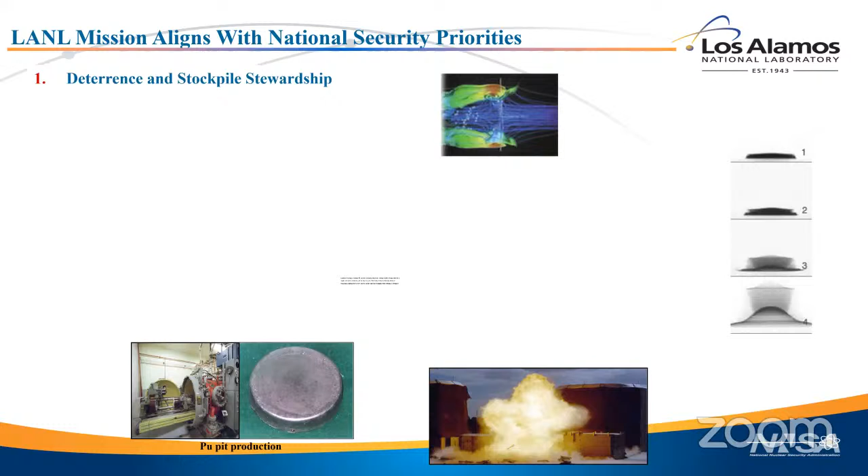There we go. Okay, so Los Alamos National Lab. The interesting thing about Los Alamos is we have a distinct mission, right? So a university or even some of the other national labs, maybe their mission isn't so well defined, but Los Alamos very much has a mission.

That number one mission is to keep our nuclear stockpile deterrent, operable and functioning and safe and all those sorts of things. So we have a goal in the research that we do, and that drives certain things.

And you can sum up our mission. This is the way it was summed up to me when I was a new staff member. So you should all be aware we don't test our nuclear weapons. We haven't for 30 or 40 years.

So you can think of this as having an F1 race car. These aren't Ford Pintos that we have out in the desert of Arizona or Texas. These are cutting edge, high technology components when they were built. So taking an F1 race car, keeping it in running shape without turning the key and starting it, and it's been sitting in the garage for 50 or 60 years, and you need to have confidence.

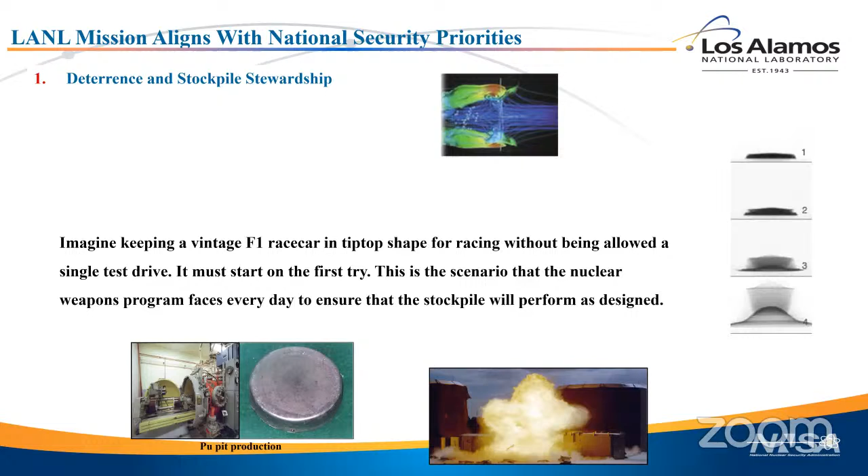Every year, the director of Los Alamos National Lab signs a letter to the President of the United States saying, I certify if you turn the key to this race car, it'll run. That's our mission at Los Alamos, is making our director have the confidence that he can write that letter to the President of the United States every year. It's a very serious mission, and we take it with appropriate seriousness.

So that's the deterrence and stockpile stewardship, protecting against nuclear threats, right? So we have lots of adversaries out there, and that's part of our job, is understanding their threats and how to protect against them. Emerging threats and opportunities, right?

Lots of things change. New technologies come out. In fact, new technologies come out now faster than ever. So trying to be ahead of our adversaries is one of the reasons we do science. We want to do the science before they do it so we can learn how to respond.

And Los Alamos has certainly, in recent years, taken energy security, and this is more prevalent than ever, right? With Russia threatening, or not threatening, but turning off gas pipelines to Europe, it's becoming more important than ever to control our own energy supply. And we take that as a security mission.

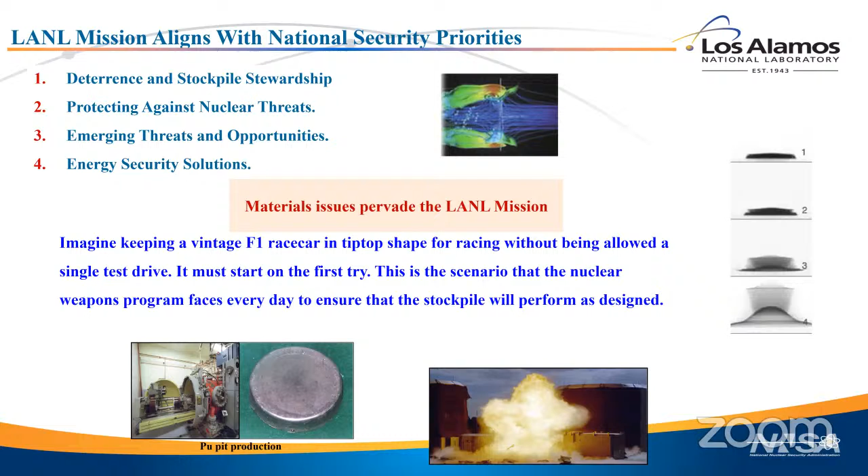So in all of these types of mission space, materials problems absolutely pervade, right? So materials science at Los Alamos is a very important part of our core competencies. Well, that means that recently additive manufacturing has certainly been an interesting thing at Los Alamos.

To be honest, manufacturing as a whole is very interesting, but in the broader world right now, additive is a very buzzword, if you will, in material science communities. So where it matters for Los Alamos' mission is...

Certainly AM enables the production of small lot quantities, right? GE has that little fuel pump thing, they make a billion of them, right? That's a different need than what Los Alamos has. If Los Alamos ever did do a large run on additively manufactured components, it might be a couple thousand components at the most. It might be one, right? Or it might be five. So additive actually gives you that ability to stand up production of small lots of components.

It allows you to be responsive and agile. You don't have to create a whole new rolling, forming, heat treating, annealing, machining process in order to make a component. You just put a new design into the machine and it spits out the part.

It reduces the amount of waste. A lot of the materials we use at Los Alamos are either expensive, exotic, or nasty things to go throw in the trash. So reducing how much of it you use in order to make a component is important.

It reduces manufacturing footprint. If you follow these sorts of things, you'll know that the most recent proposal to build a uranium foundry in Tennessee is a two billion dollar facility in order to build the components that we need. If we could make those other ways without building a huge facility, that's important.

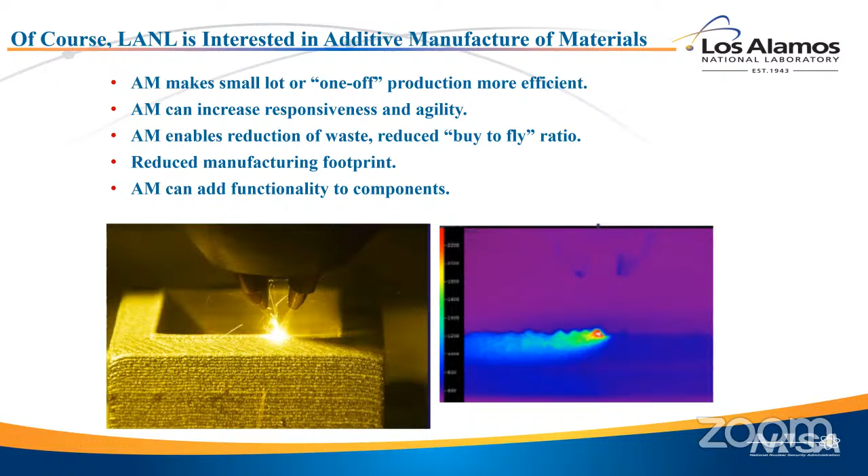Of course, additive manufacture comes with problems, right? Those of us that are familiar with AM have seen things like that before. When you grow a part with AM, you can get cracks in it while it grows. It can fracture just from the residual stresses. How to control those residual stresses is the material science problem.

On the other end of it, you often, if you are successful in growing it, get components that have different properties than you might expect—the same part from a normal casting and forging operation.

What I'm showing you here is just plain old tensile stress strain curves from titanium. The dashed line is if you make it in a traditional way, cast it and then roll it. The solid lines are all different additive manufacture processes. As is quite often the case, you get very different properties. In this case, it's 30% stronger in the AM material. And that again gets down to material science and how the microstructure is different due to additive manufacturing.

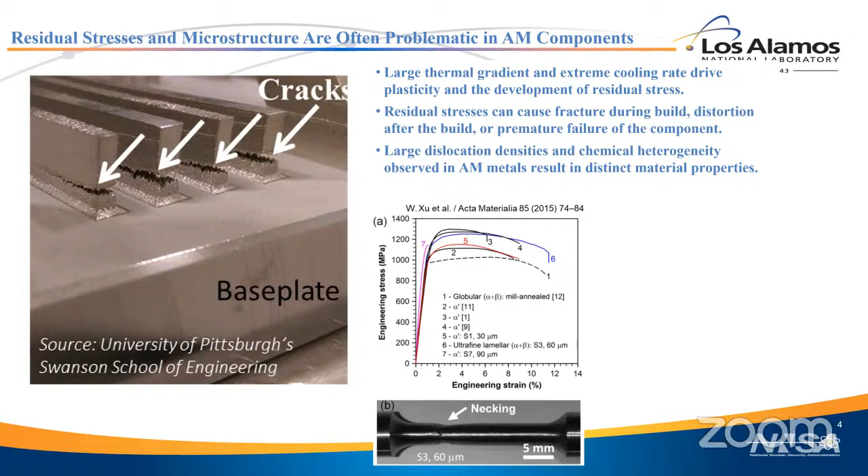That's really going to be the basis of my talk, trying to understand how different manufacturing procedures or processes can affect performance. And that's this slide, which is shamelessly stolen from Rusty Gray. I want to give him credit because he gets angry at me. He probably still gets angry at me, but at least if I give him credit, I feel better about it.

So potato chips, right? Three kinds up here: kettle cooked, Ruffles, and Pringles, all made with the same basic ingredients. If you look at the ingredients, any of those will have the same basic ingredients. They all have different processes in how they make them, and because of that, you get different properties. They taste different, they have different texture. So this is just a silly little example of process structure property relationships, right?

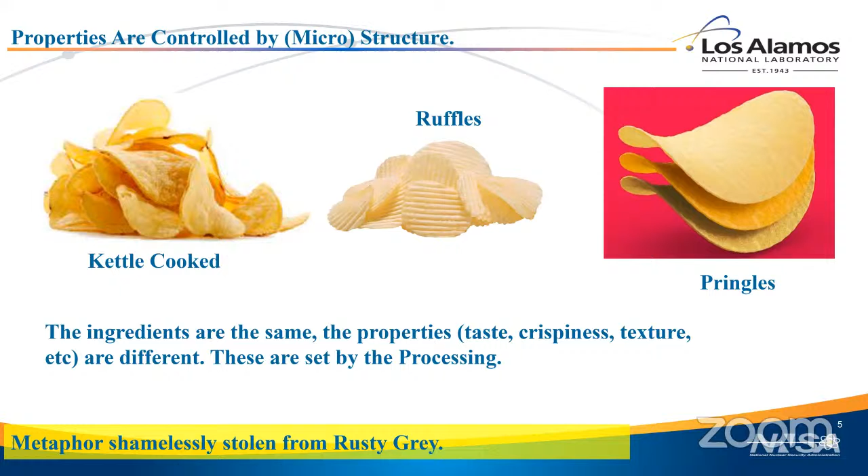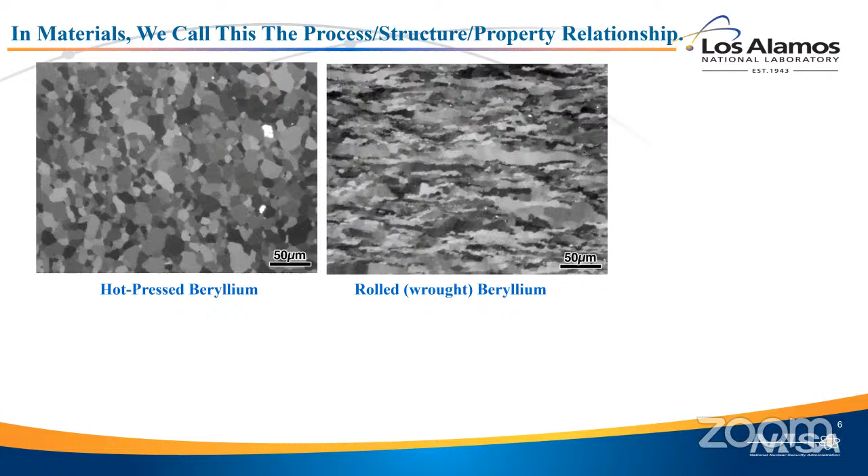Metals are very much the same thing. I'm showing you here an example of beryllium. Beryllium is typically made by powder pressing techniques. On the left is a microstructure from just hot pressed beryllium powder. You have equiaxed grains, they're all about the same size, they're isotropic. If you look at wrought beryllium, beryllium that's been rolled, now your grains are flattened out like pancakes. So here you have the same ingredients going in, but you have different structure that comes from the process, and that results in different properties.

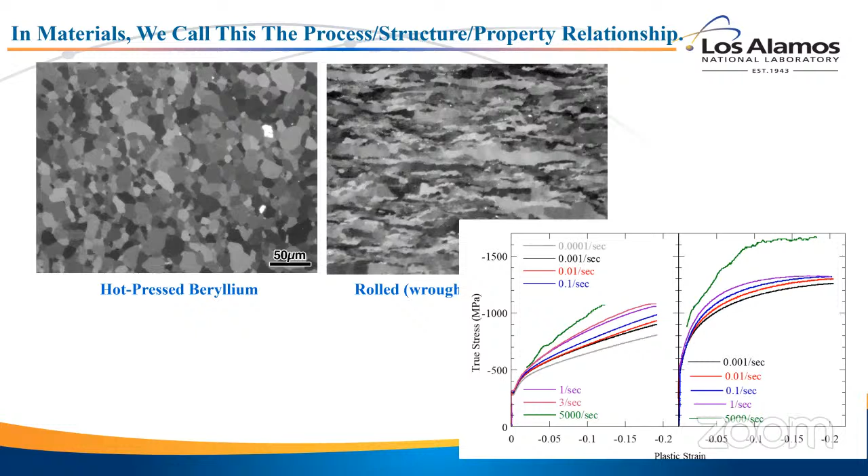Where I sit, and because I sit in the material science and technology division, I'm contractually obligated to show the materials tetrahedron at every talk I give.

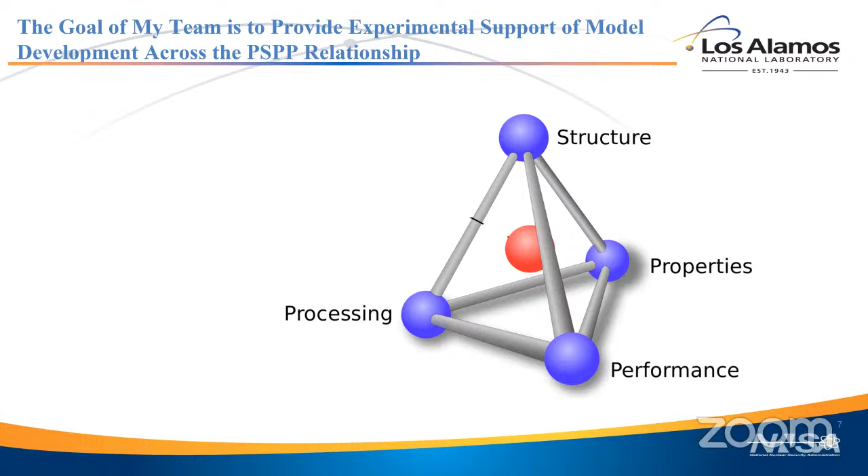Our team, the material scattering team, sits squarely on structure. And by structure, I mean microstructure now. We use diffraction, imaging, and other scattering techniques to characterize the microstructure, which is the linkage between the processing and the properties and eventually the performance. Because at least at Los Alamos, what it really comes down to is performance.

So we use diffraction. I've shown you here an example of a diffraction pattern. You can pull out different quantities from the diffraction pattern. Things like the peak position tell you how far the atoms are separated. The intensity tells you things like phase fraction. The peak width gives you information.

But we take all of that, and this is one of the things I'll kind of preach on a little bit today: parameters from diffraction patterns are meaningless, right? Telling somebody that a peak has a certain intensity doesn't mean anything for material scientists. What matters are microstructural features.

So we want to be able to pull out things quantitatively with uncertainties, like phase, defect concentration, dislocation densities, texture matters, right? Internal stresses, solute chemistry. These are all things, if you're careful and you do the measurement right, you can get out of the diffraction pattern. And that's our job.

We try to understand how processing affects structure and that impacts properties by pulling out microstructural features using diffraction. The nice thing about neutron and more recently high energy X-ray diffraction is it gives you that window onto the microstructure non-destructively. So I can look at a material as it's actually performing. I can do a tensile test and take diffraction while the tensile test is happening and watch how the microstructure is responding to that environment.

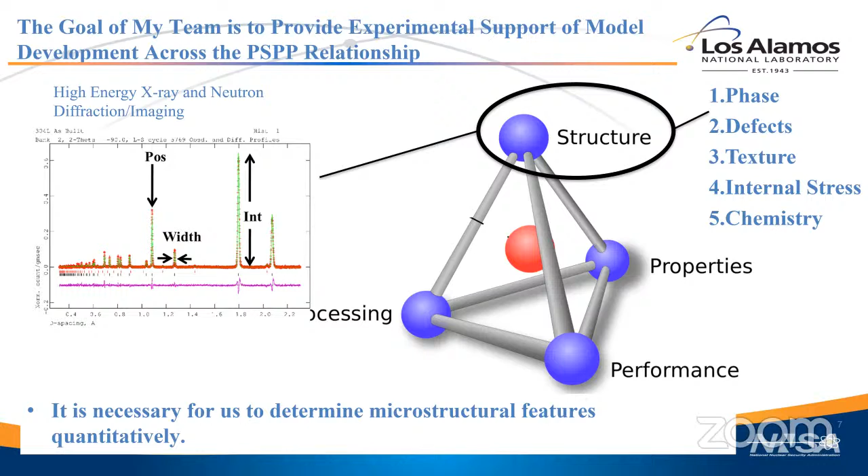Now, there's a problem with using diffraction to pull out microstructural features, and that's, I just showed you 3 different things you can essentially pull out of a diffraction pattern, and there's about 900 things in the microstructure that can affect those 3 different things. And how you deconvolute those effects is what takes you from, okay, interesting idea, to okay, that really impacts material science. So the simplest one is the spacing between the atoms, right?

We use diffraction to measure the spacing between atoms very accurately, to about 10 parts per million. Think about that. That means we're measuring the spacing between atoms to femtometer accuracy, okay? And it's actually not that hard to do. But how do you interpret that? Because there's a lot of things that can change.

Certainly temperature, right? If you're doing annealing in situ, you raise the temperature, that changes the spacing between atoms. It'll also change the solute chemistry, and the solute chemistry changes the spacing between atoms. Stress will change the spacing between atoms too, right? If you squeeze something, the atoms get closer together. That makes sense. And that even has sub-areas that are convoluted within it. You have type 1, type 2, and type 3 stresses: macroscopic stresses, intergranular stresses, and intragranular stresses. Those all affect the atomic spacing.

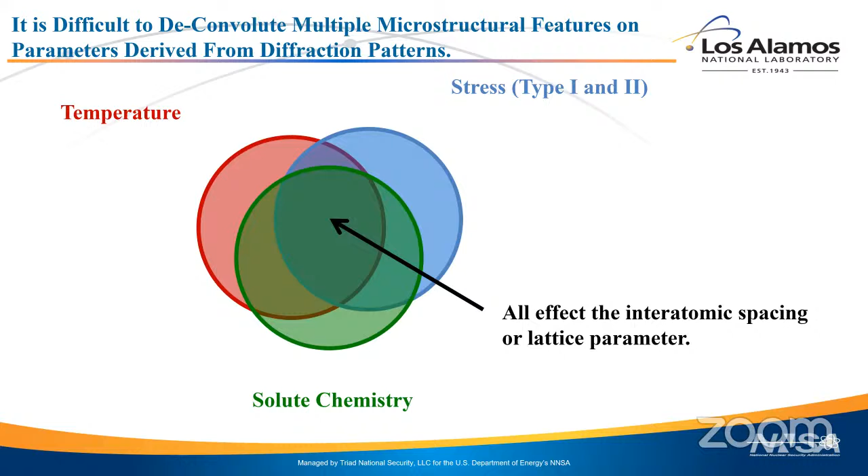So how do you deconvolute all those effects out of the diffraction pattern? That is a lot of what I'll talk about today. If you go into some of the other features, like, oh yeah, forget it - the peak intensity, same thing. Phase fraction will affect the peak intensity. Preferred orientation will affect the peak intensity.

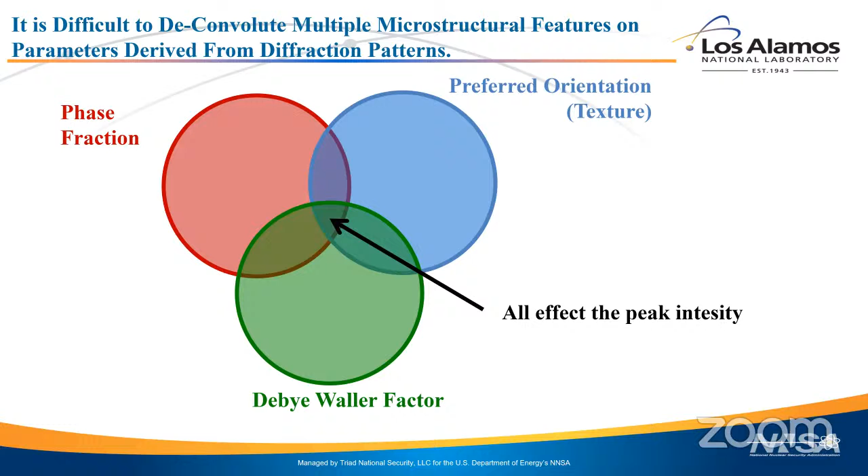One that a lot of people ignore is the Debye-Waller factor. If you change the temperature, that will affect the peak intensity. Those things, again, are all convoluted. If you go into peak width, this is where things really get hairy. A lot of times, people will interpret peak width in terms of microstructural features like dislocation density, like coherent crystallite size, but there are a lot of things that can affect peak width.

If there's no other message that I get across today, especially to students, it's that you need to think carefully about how you interpret your data, because there are a lot of things that could be convoluted in with that. Lunar phase even affects peak width sometimes.

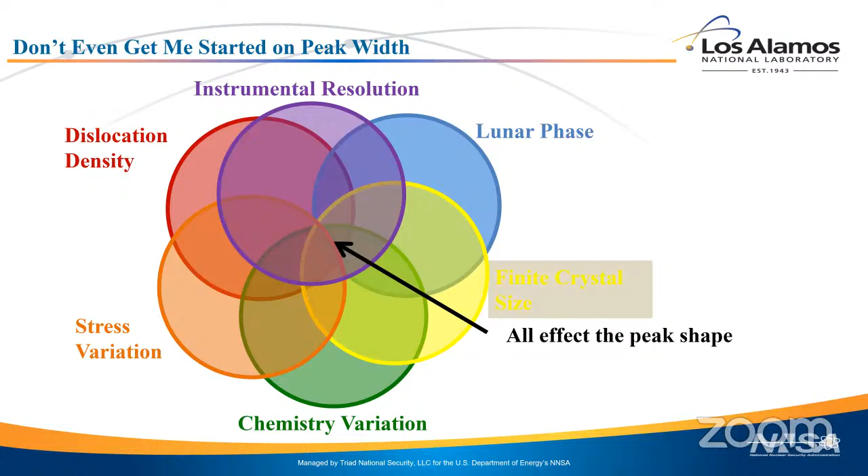So how do we do that? I think peak spacing is the easiest one to deconvolute in my mind. If you think about diffraction, you get out the Debye-Scherrer cone of diffraction. When you're trying to determine the interatomic spacing, you're measuring the radius of that cone. This is supposed to be a schematic picture of the Debye-Scherrer cone as it intersects the computer screen. In this case, it's a perfect circle.

It's supposed to be a perfect circle if the projector is on, so that's nice and simple. If you change temperature, still nice and simple. Temperature is a scalar, so it changes your Debye-Scherrer cone in a symmetric way. The radius gets bigger as the temperature gets smaller - it's an inverse relationship. So temperature has a relatively simple effect on the interatomic spacing, on what you actually observe, which is the radius of the Debye-Scherrer cone.

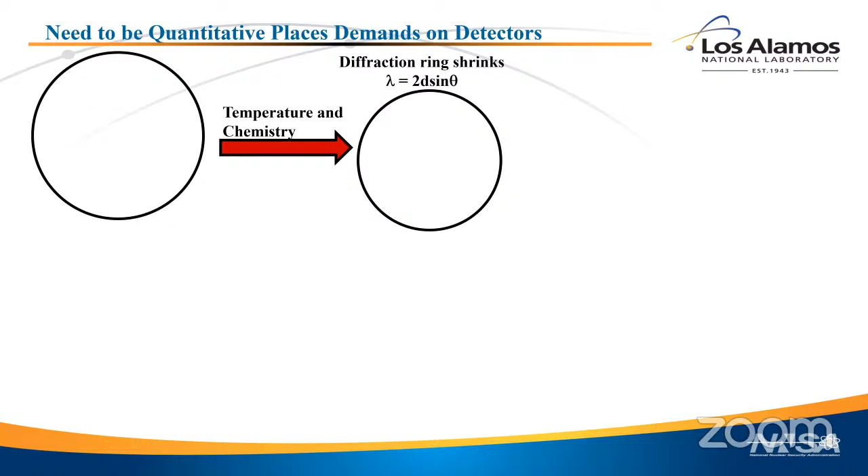Unfortunately, solute chemistry has the exact same effect. This can get more complicated if you think of second order interactions, but to first order, if you change the chemistry - say the amount of vanadium in solution in Ti-6-4 - you just change the radius of that Debye-Scherrer cone. So it's hard to segregate chemistry from temperature if you don't know anything else a priori. You usually have to know something else, like measuring the temperature a different way.

Stress, however, gives you a different effect. Stress is a tensor. So if I pull on my sample this way, the atoms get further apart this way. That means the Debye-Scherrer cone actually gets smaller in that direction, and larger in the other direction, because of the Poisson ratio effect. That's an effect I can separate from temperature or chemistry because it's a tensor effect, where temperature is a scalar effect. If I measure the full Debye-Scherrer cone, or enough of it, I can separate the effect of temperature from the effect of stress. So if I'm annealing something, I can tell the difference between thermal expansion and stress relief, for instance, and you'll see that example.

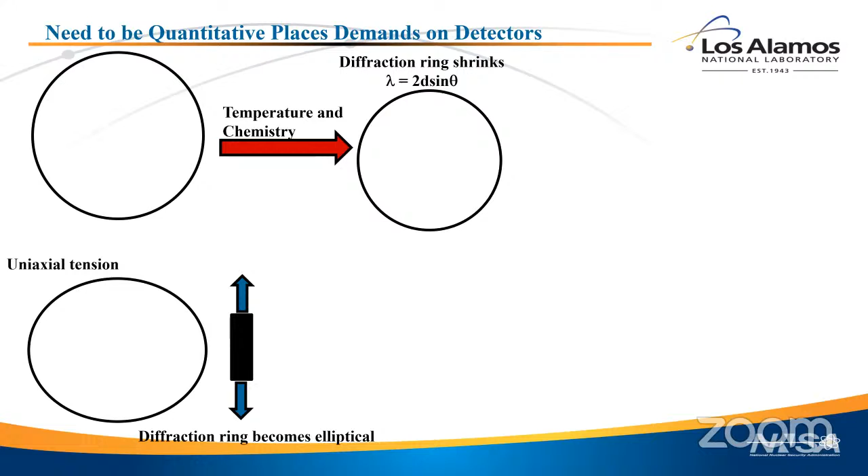Now, a shear stress is a little different - a uniaxial stress turns the cone into an ellipse, and the shear stress rotates that ellipse - it rotates the major and minor axes. So again, those are things I can separate out.

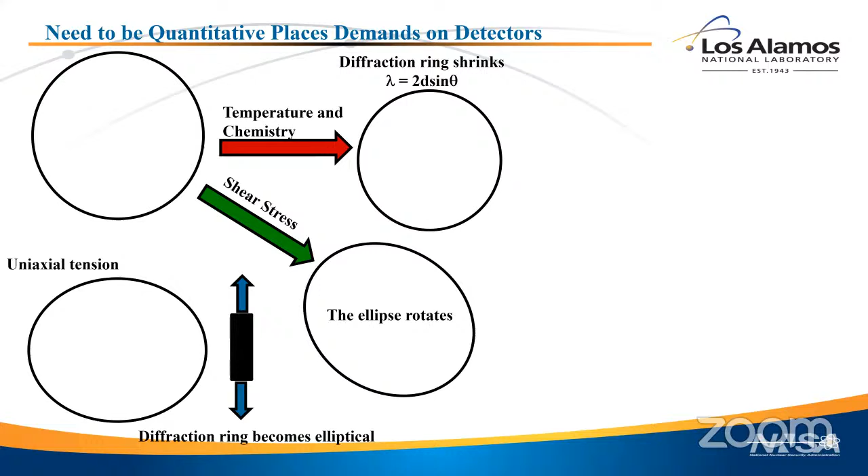So these are all the things that go into it when I make a measurement of lattice parameter. I consider all these things when I interpret it from lattice parameter, which is not very useful, to internal stress, which is something that's useful. And that's the case for all the microstructure features we're going to pull out. There's everything I just said, written down.

I sit at Los Alamos Neutron Science Center. I went to Los Alamos specifically because I wanted to be an instrument scientist at one of these types of facilities, and Los Alamos Neutron Science Center was a good choice for that. What it is, is a proton beam about two-thirds of a mile long, accelerated to 800 MeV. We take that proton beam and use it for lots of things along the way - I won't go into details. Where we sit is down here at the end of it, the neutron scattering center.

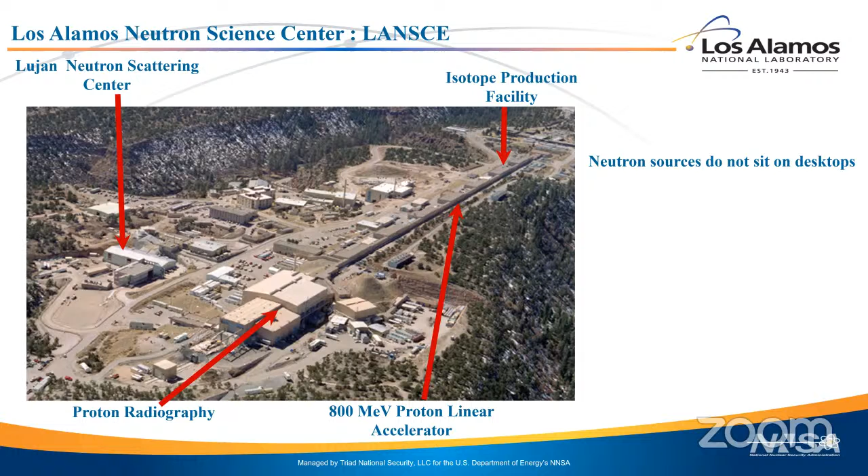That proton beam, we slam it into a tungsten target, and it hits the tungsten nuclei hard enough that it literally blows them into pieces. It's called a spallation reaction. It takes those nuclei and turns them into their base protons and neutrons that go flying out, and we collect those neutrons and use them for scattering experiments. That's as much as you really need to know, but that's where we do some of our work - we use neutron diffraction to do the sorts of things I'm talking about.

Neutrons aren't perfect, aren't the right tool for everything. We also use X-ray diffraction sometimes, but this isn't your grandfather's X-ray machine sitting on a bench top in the lab down the street, electrons hitting a copper K alpha target, giving off X-rays.

Those are 8 kiloelectron volt X-rays. They penetrate a few microns into most metals. We use facilities like the Advanced Photon Source just outside of Chicago, or CHESS up at Cornell, not too far from here, where they produce X-rays in a synchrotron. Again, this is about a mile in diameter circumference.

The beamline that we use produces X-rays up to 100 kiloelectron volts. At that energy level, I can start to penetrate macroscopic amounts of metal. I can penetrate 2 centimeters of titanium, for instance, with a 100 kilovolt X-ray beam. I can penetrate 0.5 millimeter of uranium, which gets us into the area of interest for Los Alamos.

So the probe particle we tend to use depends a lot on the problem we're trying to solve. It depends on the kinetics of what we care about. Neutrons are inherently slow, you only get so many neutrons out, limited by heat flow and things like that. The neutron measurements in general are slow. They look at bulk amounts of material. My neutron beam might be anywhere from a couple millimeters to a centimeter big, so I'm looking at cubic centimeters of material and averaging over all of the grains in that cubic centimeter.

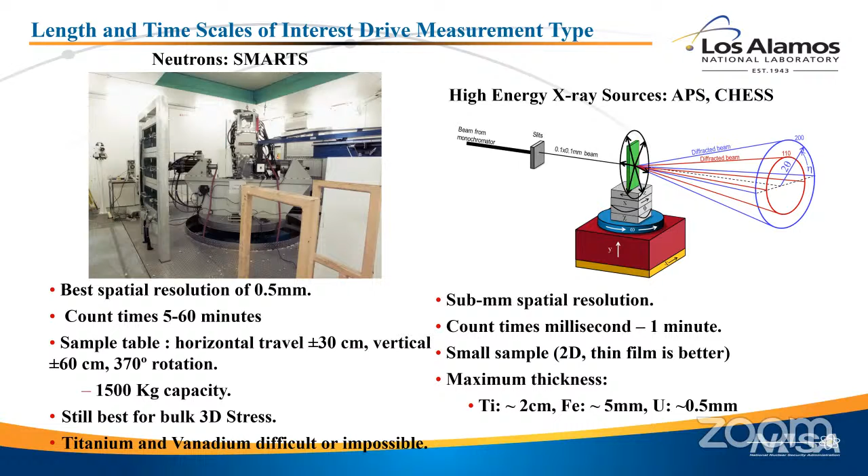So the first example I'm going to give you is in situ wire arc additive manufacturing. This was done at the Advanced Photon Source, and this is the actual process going on. We have a wheel that's rotating, and as it rotates we're depositing material on that, and we're passing X-rays basically right along into the screen. We pass X-rays through that depositing material and collect diffraction data while it's solidifying and cooling, and we can pull out microstructural features while that's happening.

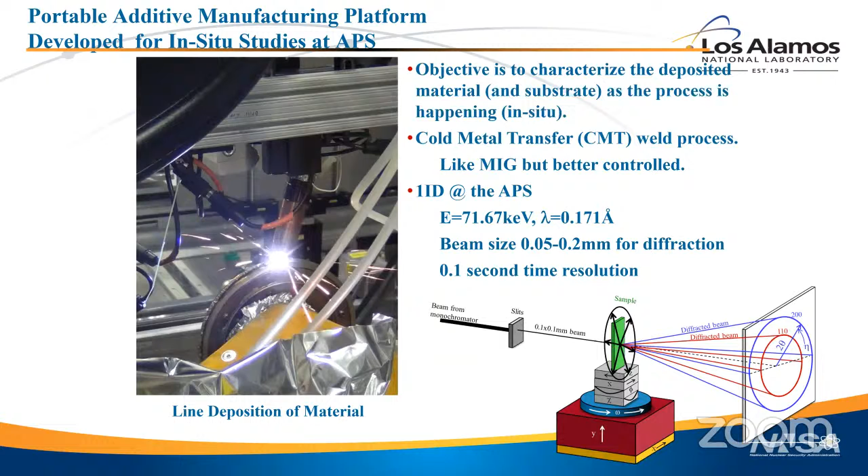Here's a better movie—well, maybe not, since it's not bringing up the bar. But you can kind of see here, what you're seeing is a droplet of material coming from a wire arc. There's a wire above that you can't see, it creates an arc, material flies off that arc, just like a TIG welder or a MIG welder. That droplet of material lands down on the plate and starts to grow a bubble.

This is how welding works, it's how wire arc additive manufacturing works. While this is happening, we're passing X-rays through that bubble, which is the glowing part. It doesn't look like a bubble now because it's wiggling, because it's liquid. We see the liquid and watch it as it solidifies, and we watch the texture and phase transformation. This is 304L stainless steel, so it solidifies in the ferrite and transforms to the austenite. We're going to attempt to watch all of that happen with the X-ray beam and pull out microstructural features as it happens.

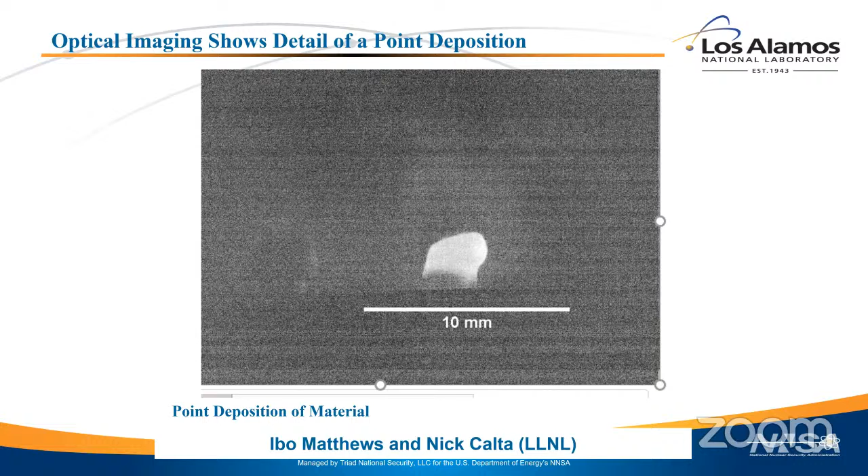This is a schematic of the instrument. So from the left, you have the X-ray beam coming. It was about a 70 kilo electron volt X-ray beam, so it'll penetrate the 3 millimeter drop of steel that we have on there. It penetrates it easily because it's such a high energy X-ray beam, the wavelength is very short.

If you remember Bragg's law, as the wavelength gets small, the angle of scattering gets small. So the scattering angle is actually about 2 or 3 to 5-ish degrees, the Bragg angle. So this is actually the Debye-Scherrer cones that I referred to. We actually measure about 5 different Debye-Scherrer cones for each phase that's in the stainless steel - the austenite, the ferrite - we'll see 5 different HKLs, 5 different peaks from each phase.

And that gives us enough information to determine phase fraction and separate phase fraction from texture and things like that, and Debye-Waller factor to a degree.

So the way we analyze the data, because as I said, I want to separate a scalar effect, which is temperature, from a tensor effect, which is stress, we take these rings, and the first thing we'll do is integrate all 360 degrees about the angle eta that I've defined on that picture. And that gives us the average lattice parameter, and that's what's related to the temperature. You can go through the mathematics, I won't do that here.

Then we break up that ring into 24 15-degree increments, call that caking. It's because the program was written by an English guy. If it was written by an American guy, it'd be called PIE, which is a lot harder to say than caking.

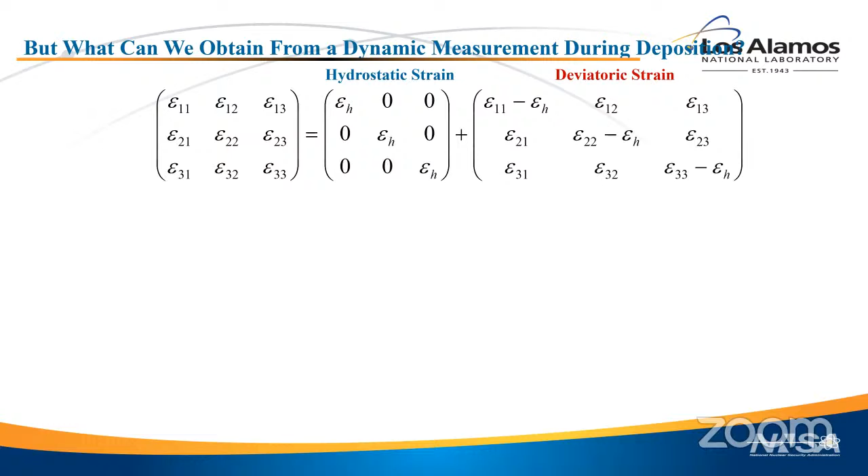So if you think about the strain and how that lattice parameter measurement happens, if you take the strain tensor, which is on the top left, there's 6 independent components on there. You can separate that into a hydrostatic part and a deviatoric part. And if you do the math, if you calculate a strain from the deviatoric part, here you basically subtract out the average lattice parameter, you see that the deviatoric part becomes relatively insensitive to the reference lattice parameter.

And that's where one of our problems always is - how do you measure a reference lattice parameter? Because it's just hard to get. So by subtracting out the average the way I've done here, you get the deviatoric strain is only linearly related to the reference lattice parameter A0. Well, that only changes a little bit, so a proportionality there isn't a big deal in the uncertainty.

The problem comes in the hydrostatic portion, which is here. Now you're doing a subtraction between the average lattice parameter and the reference. That difference in itself is very small. So if you're uncertain on A0, the reference lattice parameter, when you take a subtraction, that uncertainty becomes very important. When you're just doing division by A0, it's not so important because it's just linearly related. But when you're subtracting two things that are very close, that becomes actually a driving problem in your uncertainty.

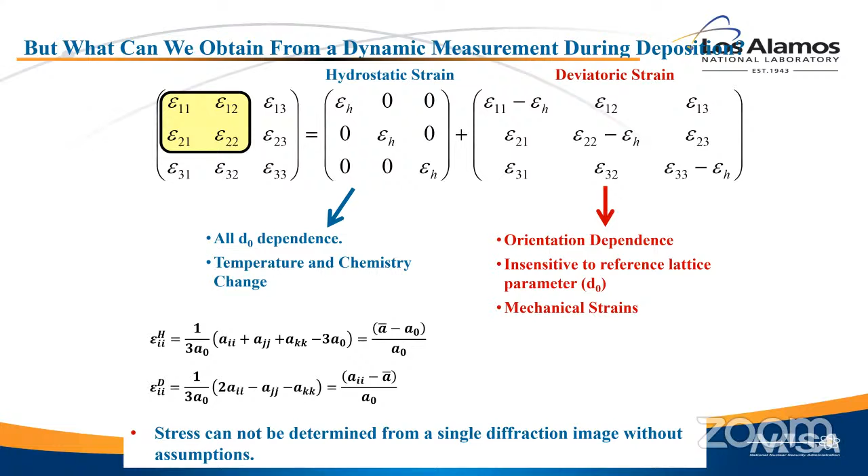Well, not only is it separable mathematically like this, but it's also separable in terms of physics, and we've talked about this. The deviatoric strain is all of the orientation dependent part - that's where all the mechanical strains show up, stress. The hydrostatic strain is the temperature and chemistry. So you can separate it both mathematically and in terms of interpretation, and that's what lets us pull out microstructural features from an effect that's pretty convoluted.

This deposition took 1 second. So we basically turned on the welder for a second. It put down this little 3 millimeter - well, we call it a cow patty, you can imagine why we did that - this little 3 millimeter point deposition, if you want. And while that was cooling, we're collecting data.

When we did this measurement in 2017 or so, the fastest detector could only read at about a 10 hertz rate, so that was limiting on how fast we could collect data. When we did these experiments, more than really trying to understand stainless steel, we were trying to understand the technique and how far you could push it.

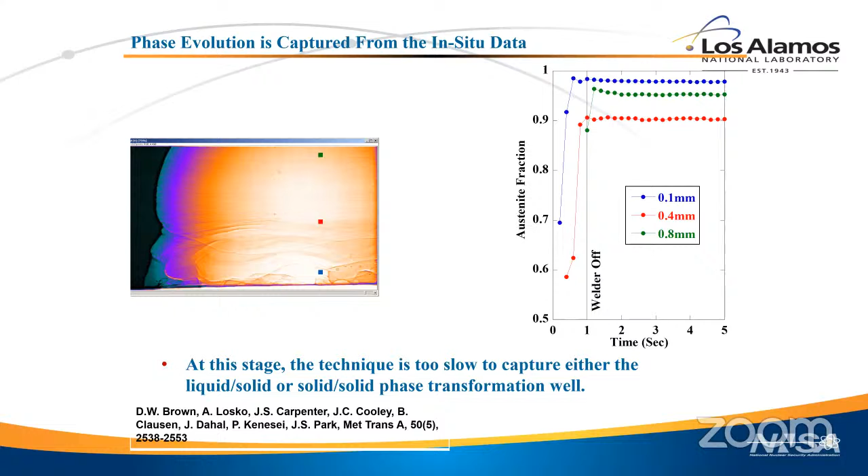Oh, that's not good news. Oh, I have an hour. Oh, it's not showing that. It's good that it's not showing up there. I just got a message that my laptop's going to restart in 59 minutes. So we're okay, hopefully I won't talk that long. Although if you're interested, I'm happy to.

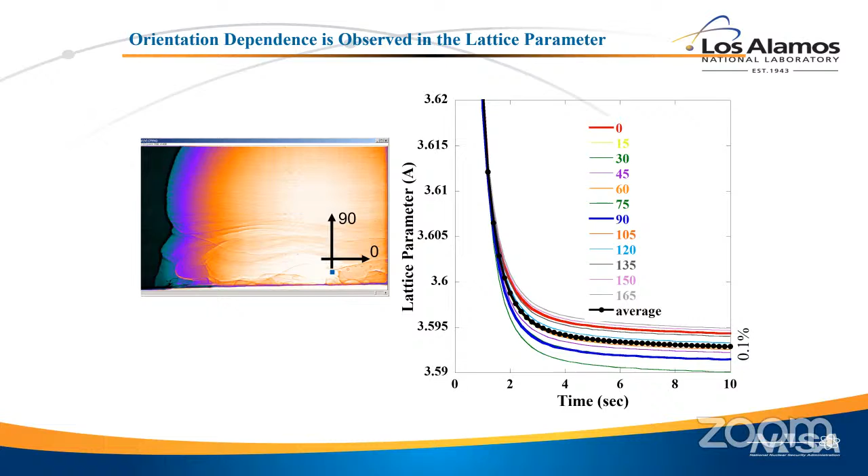If you blow that spread up a little bit, you can see better the orientation dependence. So we get the temperature and the stress out of this as it develops. We're actually getting enough temperature points - our time resolution is sufficient to measure temperature as a function of time as it quenches.

And then taking the derivative of that, we can actually get cooling rate as a function of time. That's important because it's the cooling rate that tells you how the chemicals segregate as you go through the liquid to solid phase transformation. So wire arc additive manufacture cools at about 1,000 degrees per second, which is, if you read the literature 10 years ago, kind of the estimate you would expect. These are one of the first, possibly the first, internal measurements of what that temperature cooling rate is.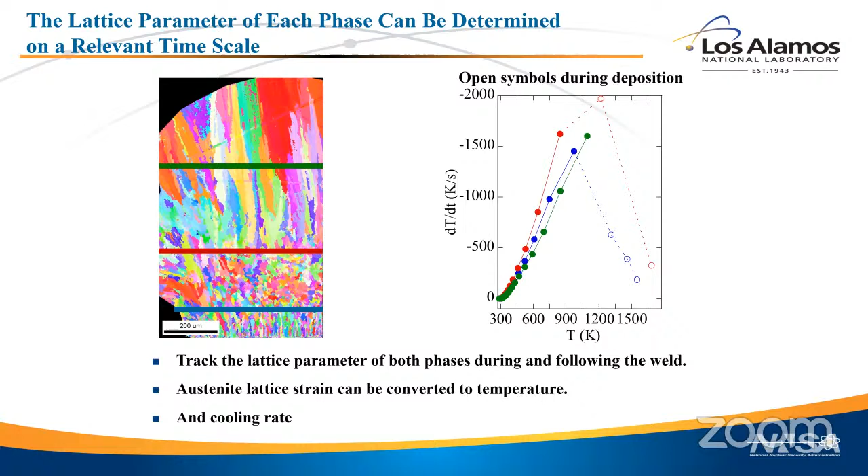Let's get through this in the interest of time.

As I said, the kinetics of the experiment we're doing here were actually still too fast for our measurement technique in 2017. That's actually changed - detector technology is exploding because the X-ray fluxes are driving the detector technology, making them so fast now. If you did this measurement now, the detectors can measure at sort of 250 to 500 hertz, where we were looking at 10 hertz 4 or 5 years ago. So what I'm going to say isn't necessarily true anymore, but there's always faster kinetics, so it's still relevant. The point is, when we did these measurements, our detector wasn't fast enough, so we had to come up with a way to slow down the kinetics.

So there were two things we did. Instead of just depositing a point of material and then turning the welder off so it cooled very quickly, we rotate that wheel and deposit a line of material, doing actual additive manufacture, if you want to look at it that way.

Because you're continuously putting heat in, that greatly slows down the cooling rate. But what it also does is set up a quasi-steady state situation at the point where the melt pool is, because as you're depositing material and it's solidifying, it's being moved away by the rotating wheel you're depositing it on. So after some amount of transient time, you set up a quasi-steady state.

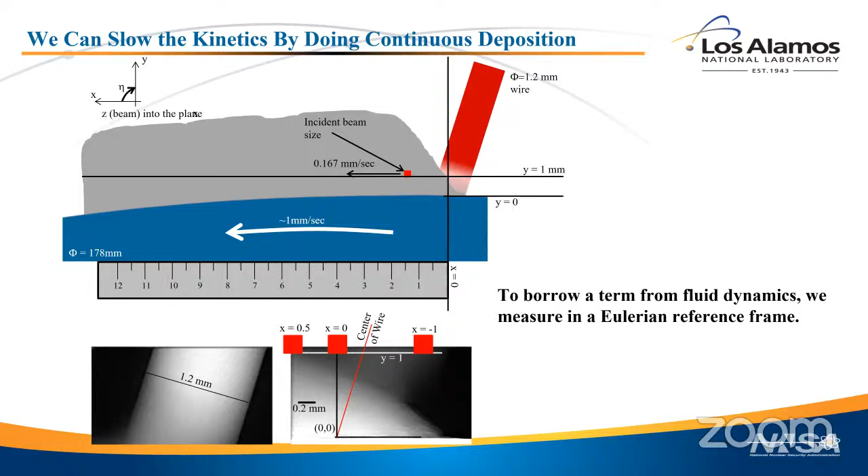So what that means is as we move... well, I'll just move on now because the movie started. This is a bunch of diffraction patterns we collect. There's liquid, you see the broad rings, and there you see the sharp rings, that's solid. You see coexistence of liquid and solid, and now it's fully solidified. You see the rings, but they're not complete rings, and if you look closely you'll see there's symmetry to the rings. That's the crystallographic texture. As it solidifies, certain grain orientations are preferred - there's a crystal growth direction, and that shows up in how the intensity varies as you go around those rings. So we can see the phase transformation from liquid to solid. It happened too quick to see in the movie, but you can see the change from ferrite to austenite. You can see the texture evolve, we can see the stress develop. Those are all microstructural features we pull out of the data you just saw.

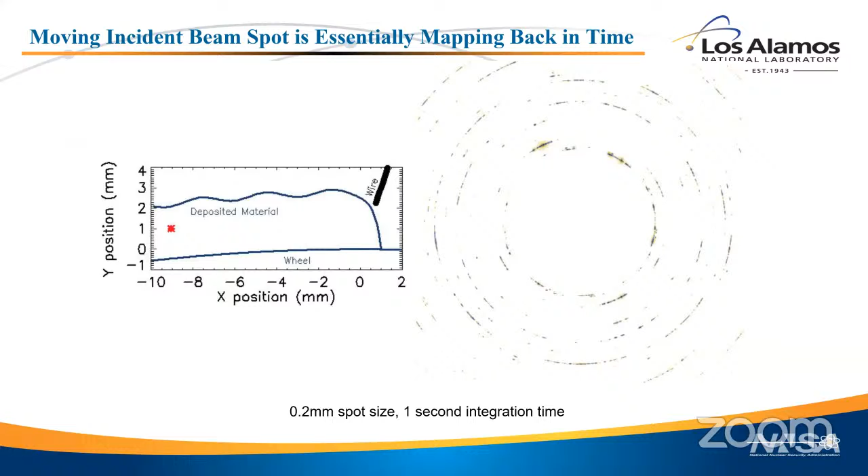So this is more like normal EBSD that you would see. This is a section of that line of metal we laid down, and the white shading on that line is where our X-ray beam was penetrating when we laid this material down. So that's our integration volume.

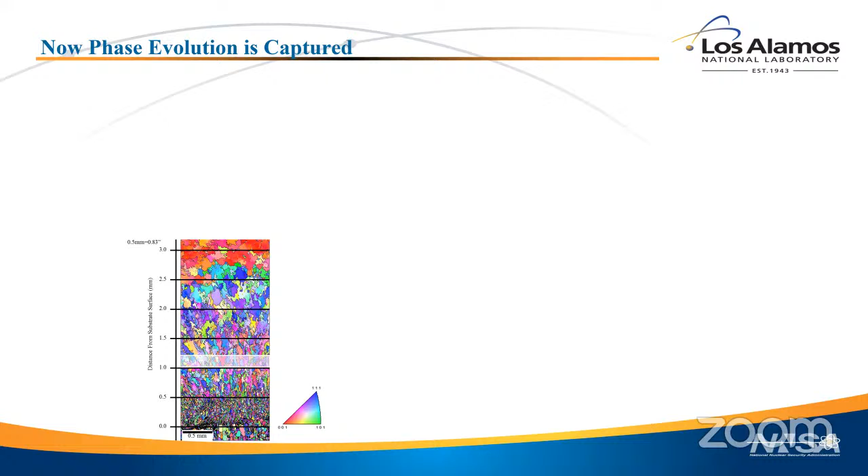If you take those rings and do a polar transform, turning them into rectilinear coordinates, on the far left you see liquid - that's a nice broad diffraction beam, right at the melt pool. As you come further to the right, you're moving further from the melt pool - in some sense you're moving back in time, seeing material where it's been longer since it solidified. You can think about it either way. Again, the spacing as you go down, the way the bright spots are, that's the texture showing up - instead of being around the circle, now they're in lines. It might be hard to see from your seats, but I've indexed the two different phases in stainless steel, the austenite and the ferrite.

304L stainless steel is a ferrite former - it solidifies as ferrite and then transforms to austenite. If you talk to welders, that's really important, that's everything in welding steel. If it forms as austenite and then turns to ferrite, it'll fracture. So that's why you actually control the temperature in this steel, to make sure it forms as ferrite first and then transforms to austenite.

If you take those diffraction patterns on the left and integrate them vertically over that angle eta, you get what we're used to seeing as diffraction. On the top is again the liquid, those broad peaks are the liquid scattering. If you go a millimeter away from the melt pool, the red dotted line is just a copy of the liquid scattering translated downward. The sharp peaks of the diffraction, the two sharp peaks, this one is austenite, this one is ferrite. It's more complicated than that, but we'll get the fractions of austenite and ferrite from the ratios of those and the other peaks.

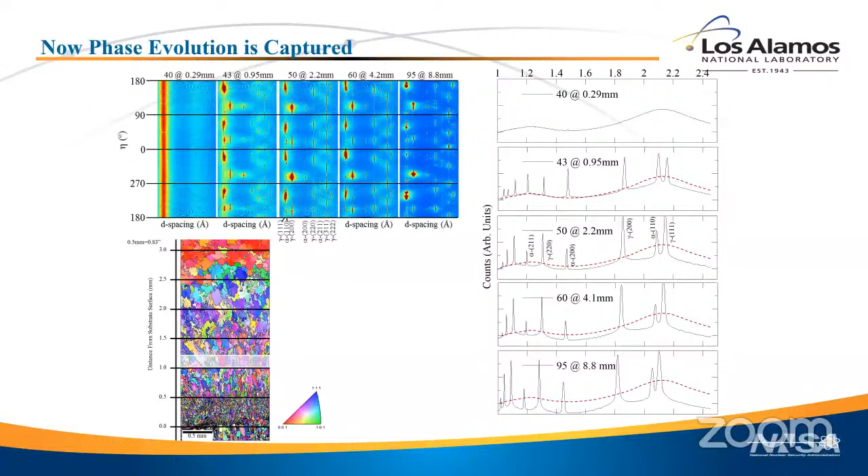As you come down, you see less and less broad scattering, meaning less liquid as you move away from the melt pool. You can also see those two peaks I pointed out are almost the same intensity at the start. As you move down, and this is on a log scale so it's a little muted, the peak on the right becomes stronger than the peak on the left. This is austenite, that's ferrite. So what you're seeing is the phase transformation from ferrite to austenite as the relative amount of those two peaks changes.

Now we can pull out the temperature as a function of time, and we can pull out the liquid-solid fraction. It starts out as purely liquid, and drops pretty quickly. Again, we're not quite fast enough to measure liquid to solid — that transition happens really fast, so we only get one or two data points in the interim. But then it's slowly a mushy zone. We really don't believe there's any liquid out there at 5 millimeters from the wire. That's certainly not true, but anyways...

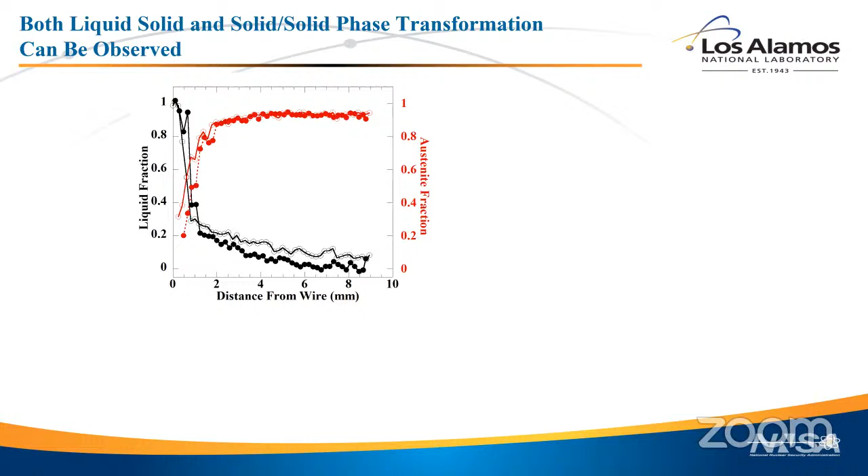You can then break the solid up into the amount that's ferrite and the amount that's austenite. This in red is the fraction of the stainless steel that's austenite. You see it takes about 2 millimeters of travel from the melt pool until it reaches pretty much its steady state amount of austenite. In the end, you'll find there's about 4, 5, or 6% ferrite in there.

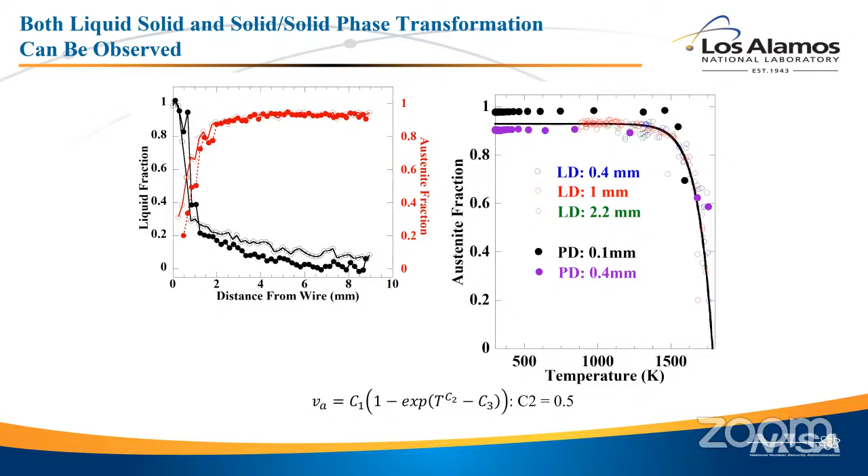If you compare by LD — line deposition — and PD, point deposition: remember, the point deposition cooling rate was about an order of magnitude faster, about 1,000, actually 1,500 degrees per second. In the line deposition, it was more like 100 degrees per second because we keep dumping in heat. Turns out the temperature at which austenite transforms to ferrite is independent of the rate over that one order of magnitude. Now, if you changed it to a million degrees per second, which is powder bed fusion, or a degree an hour, which is casting, that conclusion might change. But over this relatively small range of cooling rates, the temperature at which ferrite transforms to austenite is independent of the rate, and it's fit by an exponential equation.

So you can pull out stress. What I'm showing on the top is the eccentricity of the lattice parameter. So the average would go through the middle of all that, but you have the Debye-Scherrer cone as an ellipse.

It turns out, for various reasons, you can't pull out any component of stress. We don't have enough data. What it comes down to is we only measure in one plane. In order to get a full tensor, you have to be able to measure in 3 dimensions, and we can only measure in 2.

What I can do, though, is find the von Mises stress. Because of all these subtraction terms, a lot of things fall out, so I can actually find the von Mises stress with some level of accuracy, even only measuring in 2 dimensions instead of 3, with a set of very reasonable assumptions.

If I plot that von Mises stress developing, the red is what I'm calculating as the von Mises stress. The blue is the temperature. So you see it start at 1700 C, 1700 K, should be a right axis, I apologize for that. But you see it start out in the liquid.

And then as it cools, the equivalent stress starts to rise. The 2 black lines there are calculations of what the yield stress would be, depending on a few different things. They sort of bound it, because of course the yield stress of stainless steel depends on a lot of things other than just the fact that it's stainless steel. But that's sort of bounding levels of what the yield stress would be.

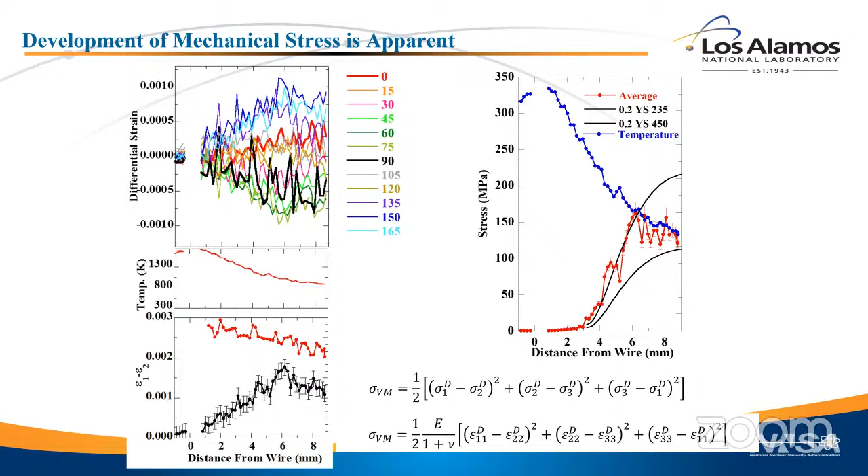So even though our goal in this was really, because we're diffraction people, we're out there trying to test the technique, we are actually able to pull out some pretty relevant science about stainless steel and additive manufacturing.

So let me go on from there to give you another example now. This is, in some sense, completely different. Once you've actually AM'd the material, and I said this early on, the properties of the AM material are often very different from traditionally cast and wrought material. And I'm showing that here.

This is a stress strain curve of 304L stainless steel, powder bed additive manufacture. The blue and red represent material that was made through parallel deposition, meaning your laser is always going like this, and crosshatch, where your laser on one layer goes 0 degrees and on the other layer goes 90. The crosshatch is maybe not obviously, but it's a much better way to make the material.

But anyways, the strength parameters come out about the same. Both the powder bed additively manufactured materials are like a factor of 2 times stronger than typical wrought stainless steel. So going back to how I started this, we're going to try to probe the microstructure to see why the properties are so different based on the process.

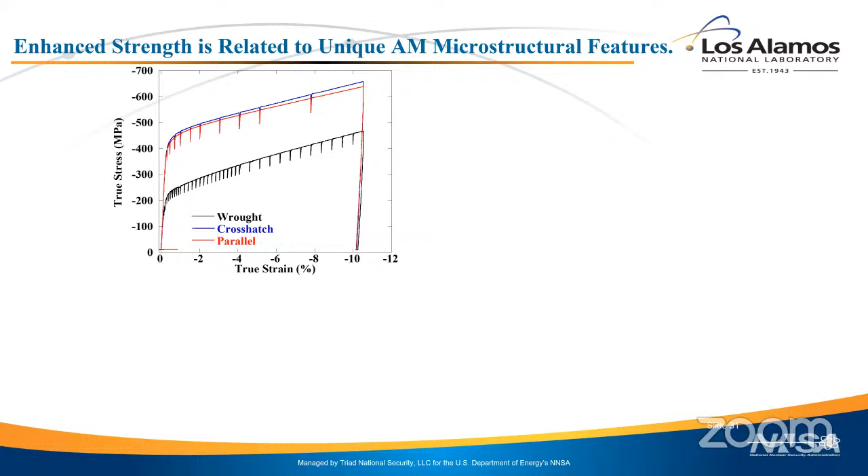Of course, you can just do ex situ microstructural things and you can get some of the answer. If you look at the microstructure of the AM compared to the wrought, you see they're very different. The 2 different sides, up and down, are wrought versus AM, at different length scales. The wrought material has a very equiaxed set of grains, and they're small. The AM material has a very tortuous set of grains, but they're in some sense quite large, and they have a lot of mosaicity to them.

If you look on a smaller scale, you can see a lot of subgrain structure to the AM material that's not there in the wrought material. That certainly affects the strength. The dislocation density affects the strength.

If you look at the dislocation density at the start, when the material is either in the as-AM or as-wrought state, we can't even detect with diffraction the dislocation density. We see dislocation density in diffraction through peak width. In the wrought material, the peaks are at our instrumental resolution, so we can't even detect dislocations. That means they're probably at about the 10 to the 12, 10 to the 13 per meter squared level.

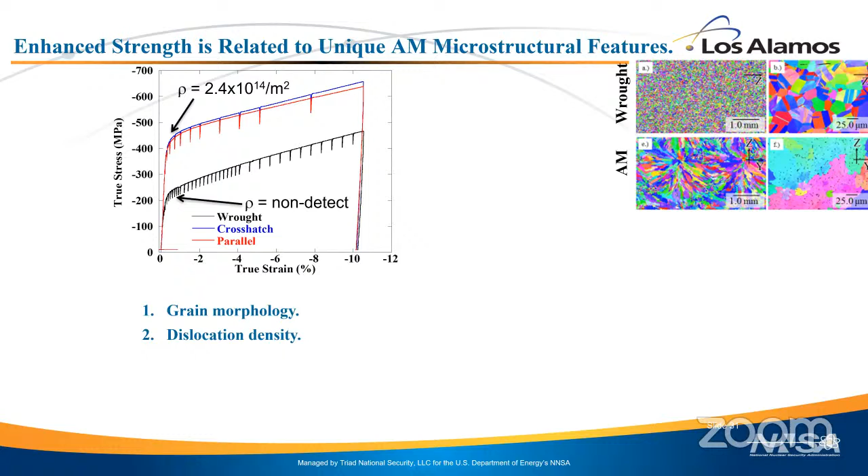In the AM material, they're an order of magnitude higher, at least, at 2 times 10 to the 14th in the as-AM material. So that also obviously affects the strength of the material.

There's a phase difference. The wrought material shown here in red has very little or no ferrite. I'm pointing to the ferrite peaks with the arrows, and there's little or none of that in the wrought material.

There's a little bit of ferrite, about 6%, in the powder bed fusion material.

And there's chemical segregation in the AM material, because you go through solidification so fast the atoms don't get to go where they want to be. What I'm showing you here is nickel and chromium content. You actually see high points of chromium, and that's where the ferrite is, because chromium stabilizes the ferrite. So where you have high points of chromium, you have ferrite.

So all of these things could be imagined to affect the strength of the material. These are all unique features to additively manufactured microstructure that are changing the properties of the material.

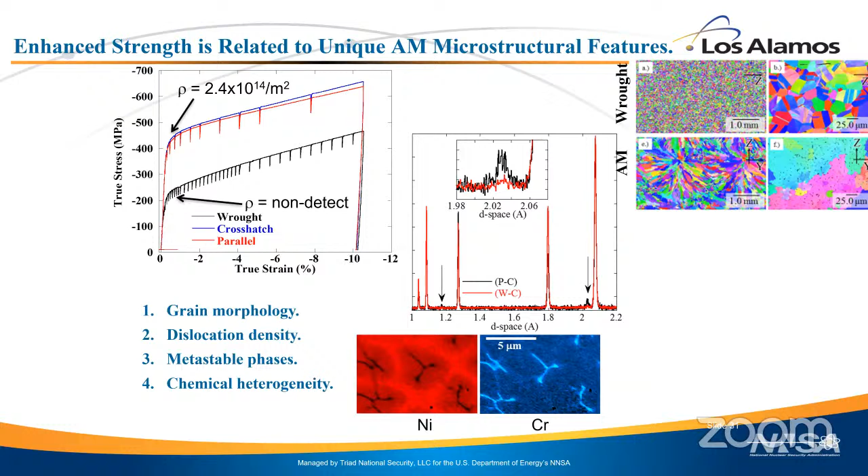We did a series of in situ annealing tests to understand how each of those features relates to the strength. We built a column, and by we, I mean Dave Adams at Sandia National Lab, built us a column of additively manufactured material. This is directed energy deposition, DED additive manufacturing, not powder bed, I made a mistake earlier.

So we built a column of that, and cut out 6 compression samples from it, labeled A to F. This isn't a perfect experiment, because we know AM properties can vary as a function of height, since at the bottom it cools faster than at the top. You can see that in the texture here a little bit - there's a stronger texture down here in F than higher up where solidification rate differs.

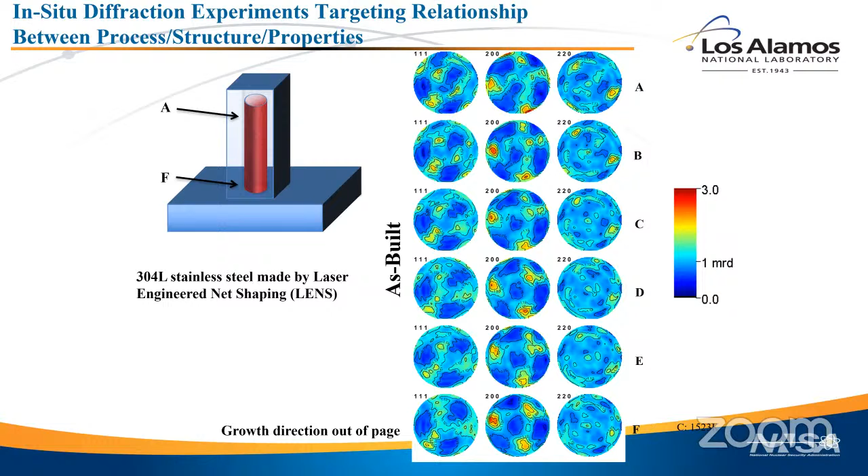But we're going to treat these 6 samples as if they're all the same, even though that's not a perfect assumption. And we're going to heat treat them in situ, so that we can watch the microstructure feature changes.

So sample E, for instance, was heat treated to 1048 K. We heated that up and watched the ferrite fraction change and the dislocation density change. I'll show you in a minute that the ferrite actually goes away first - I hope I'm saying that right. In a minute we'll know for sure.

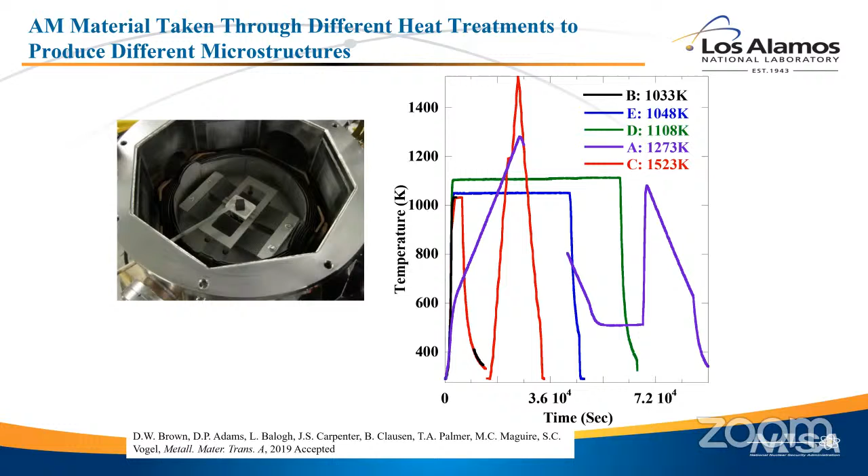So we heated it until we saw one microfeature go away, and then we stopped, and tested that material without that microstructure feature. Then we took sample A, for instance, 150 degrees higher, so we took a different microstructural feature out, and tested that material. By doing it in situ, we could selectively pull out parts of the microstructure and see how that related to the final strength of the material.

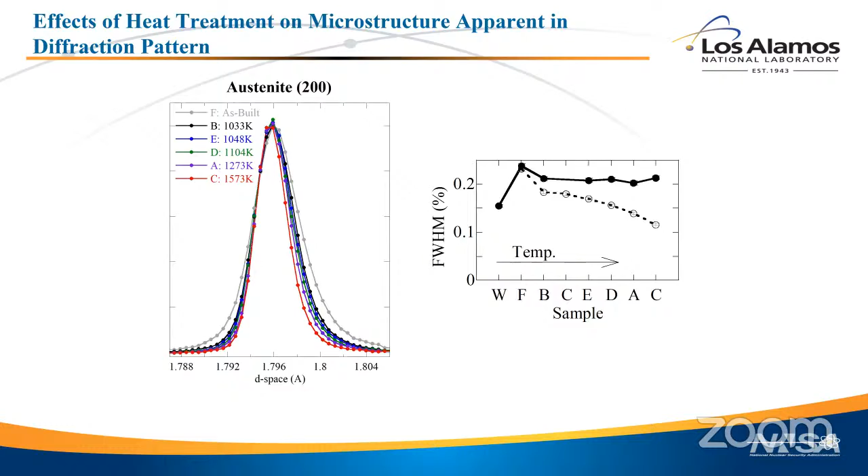So this is a recipe, and I'm not a material scientist so I don't know if you'd ever want to do this, but if you wanted material where you annealed out all the dislocations but kept 1.6% ferrite, here's a recipe for how you do that. That's our mindset when we do these things - we're trying to come up with measurements that inform folks like you so you can design a process to get the final structure you want. So this covers two of the unique features of AM material that I described.

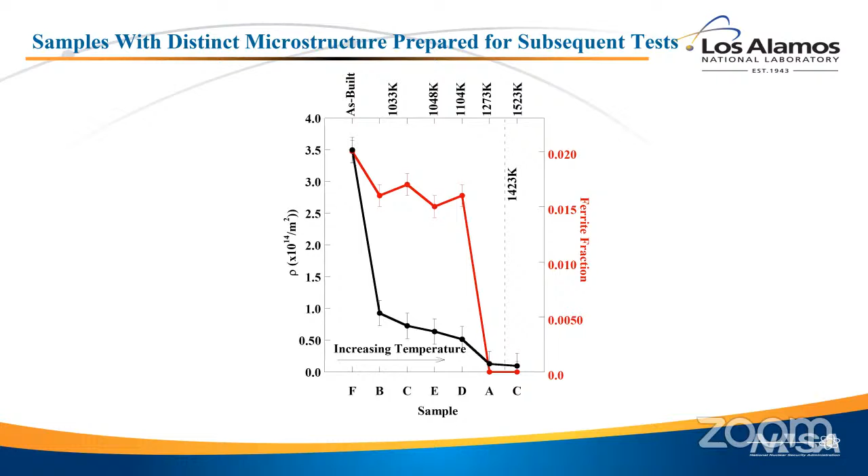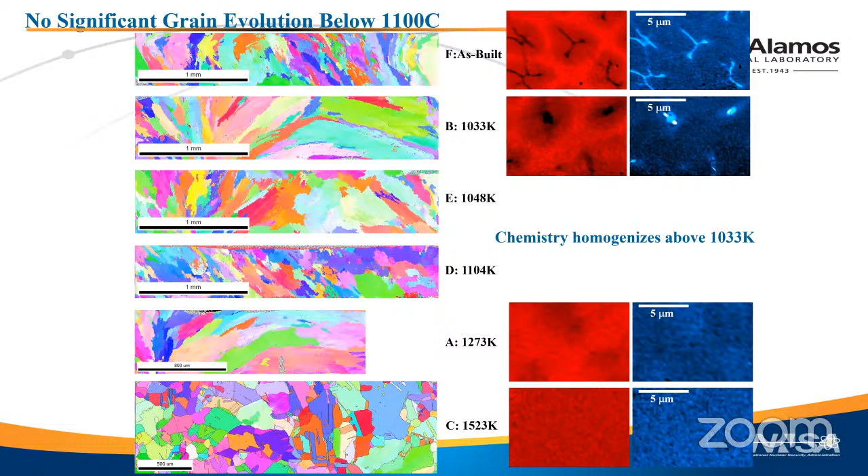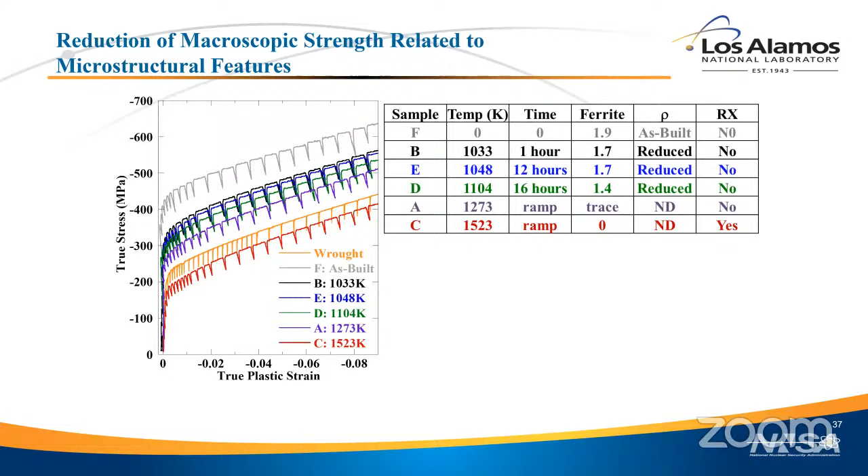So I've shown you different temperature regimes where you can take out, first, dislocation density, second, ferrite, third, segregation, and fourth, grain homogeneity. This chart shows the six samples we created by taking out one microstructural feature at a time. Then we deform those samples again and look at their strength, which allows us to assign strength to feature.

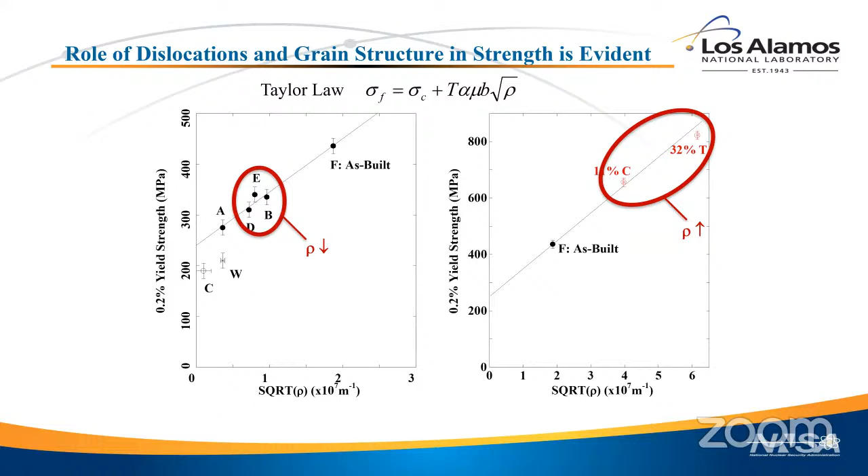A little more illustrations, and at that point I'll wrap up. Actually, not too bad on time.

So what I tried to show you, first and foremost my message, because I'm a diffraction person, is that X-ray and neutron diffraction is a window onto pulling out microstructural features from your material. Because it's non-destructive, and depending on your kinetics, it can be real time, used to monitor how your microstructure evolves during processing, deformation, performance - all those sorts of things. If you can simulate the environment, you can watch the microstructure evolve while your sample's in that environment. X-ray measurements can be used to monitor very fast processes. What I showed you was at 1 hertz - today you can certainly do 200 kilohertz, maybe 500 kilohertz. You can do individual measurements very fast, at the femtosecond time scale, but you only get one measurement at that time scale - you can't do a series of them.

Neutrons, on the other hand, are very slow. That doesn't mean they don't give you information - you want to match the kinetics of the science you're doing to the experiment you're doing.

Again, when we're doing our job right, the data we collect is being fed directly to modelers. For me to know the ferrite fraction as a function of temperature in steel, that's interesting - I can write a nice paper, but it doesn't really help anybody. For me to feed that to somebody who can develop a model, predict these things, and design a process based on that data - that's when we're doing our job well. That's really our goal as material scientists. At that point, I'll stop and take any questions.